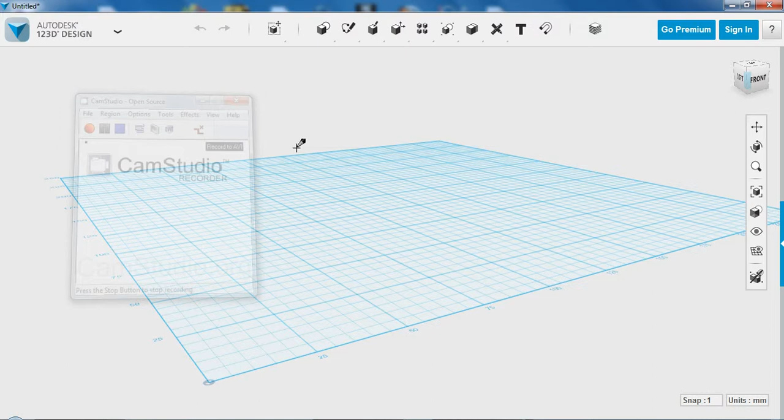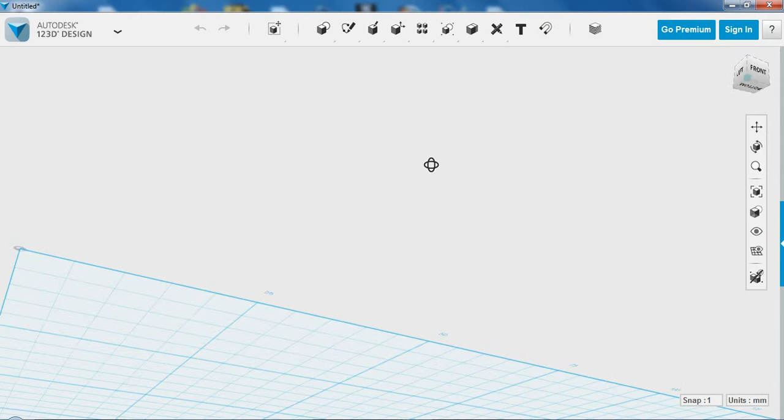First thing we need to learn is how to control the camera. Clicking and dragging on the view cube will orbit the camera. You can also click on any of the surfaces or the arrows around them to orient the camera that way. If you're using a mouse, it's much easier: hold down the right hand button and drag to orbit the camera, scroll the mouse wheel in or out to zoom, and hold the mouse wheel down and drag to pan. If you ever move the camera to an awkward position and it's difficult to see your work, simply come up to the top and click the home button to restore the camera.

The first tools we're going to use are all for 2D shapes, as if we were drawing on a piece of paper, and they're all found underneath the sketch menu. Whichever one we select, the process is always the same. We're going to start with Polyline, which just means line.

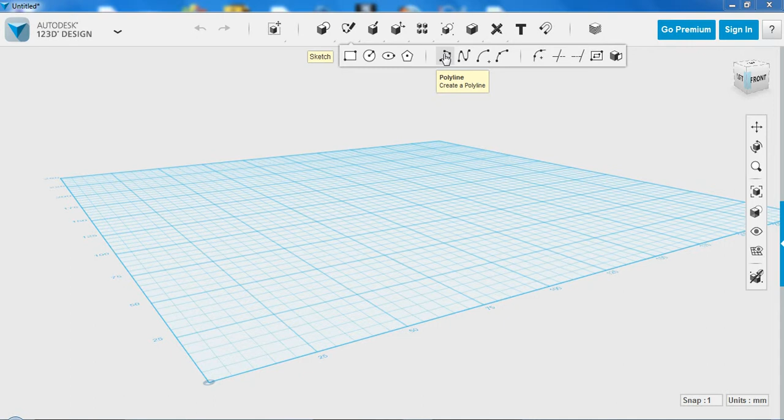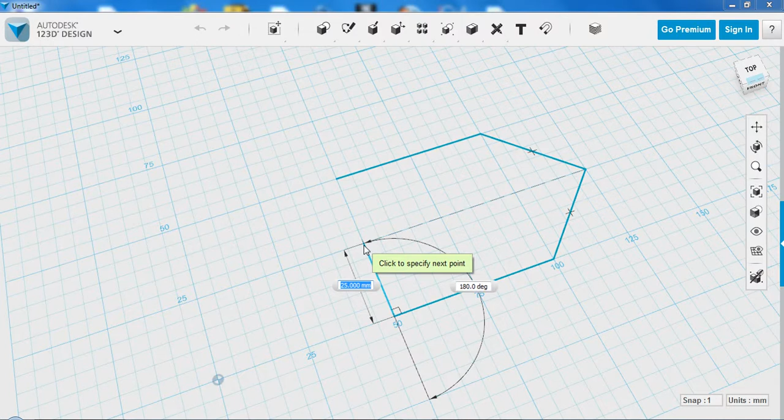The first thing we need to do is click on a grid, sketch or solid face to start sketching. What the program is trying to ask is for us to click where we would like to draw. At this stage we don't have anything except a grid, so we'll click on that. Polyline Tool works by clicking in a series of points to draw straight lines to join them up. You'll also note that measurements come up on the screen. So from this point onwards, I can simply start typing with the keyboard and then clicking to put in something at an exact measurement.

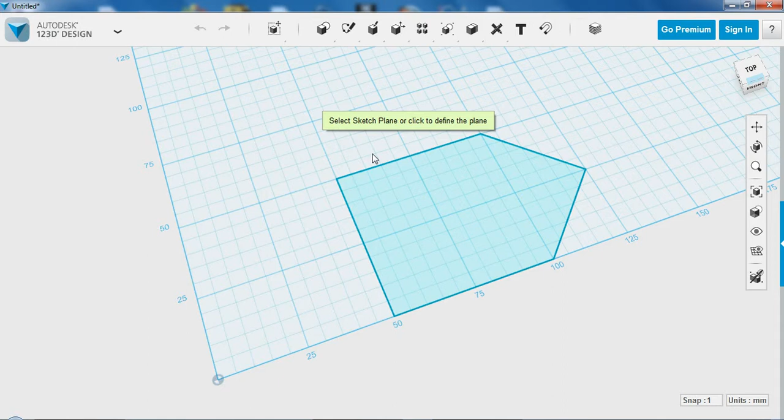Other useful tools are the rectangle tool. When you go back and select a different tool, it's very important to then click on the previous sketch you were just working on instead of the grid, otherwise the two sketches will be separate. Note the green outline to say we're working on the old sketch. Rectangle tool goes from corner to corner to draw our shape.

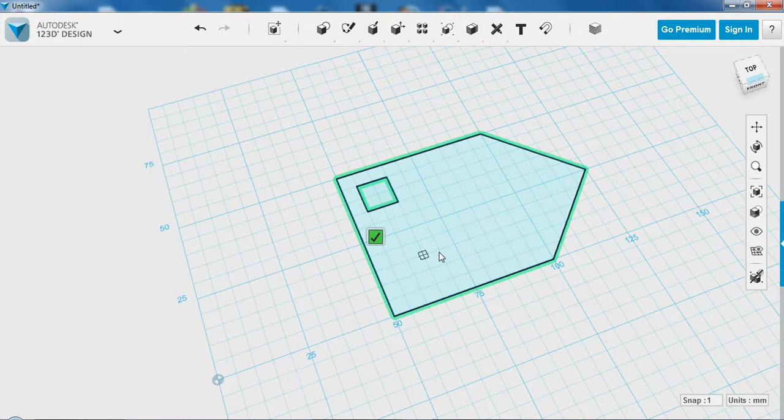The circle and ellipse tools are for drawing round objects. Once again, we click on the sketch to say we want to add to it. We click the center and then the diameter with our last click.

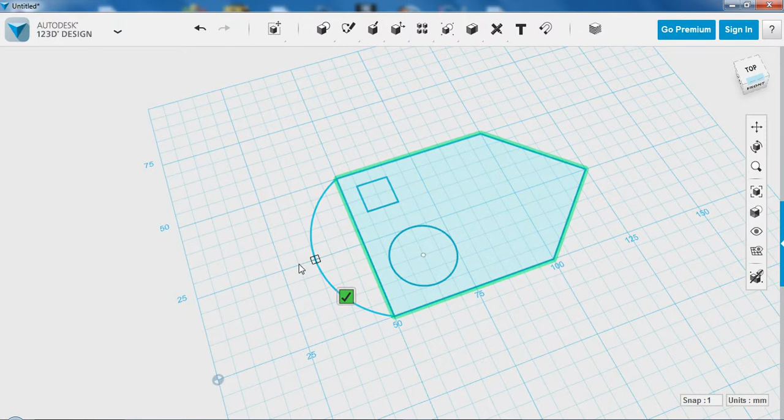To do parts of curves, we have two options: 2 and 3 point arc tools. The 3 point arc tool is a little bit easier to use. For it, we click the start and end of the arc with the third click setting how big the diameter is.

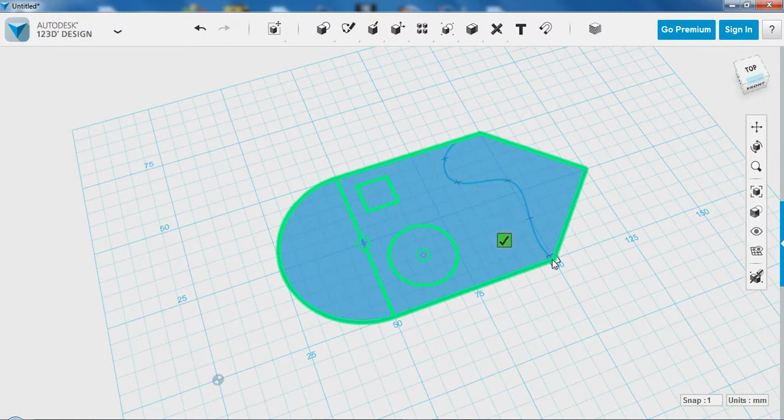If we want a more organic curve, we can use the Spline tool. The Spline tool works by clicking a series of dots, and as you can see, the program is trying its best to smooth out the curve between them. Click the tick when you're done.

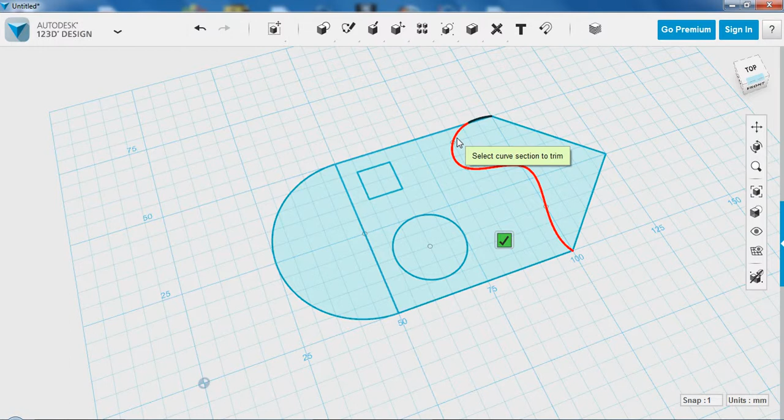We now have a 2D shape, but there's lots of overlapping and messy parts. One other tool from the sketch menu is very handy for cleaning this up. It's called the trim tool. After we select it, we'll once again have to click on the sketch that we want to work on. Now when we hover the mouse over certain parts, they'll turn red, and clicking them will delete those shapes. We can use it to tidy up various lines to finish off our shape.

Much better. Now we have a 2D shape.